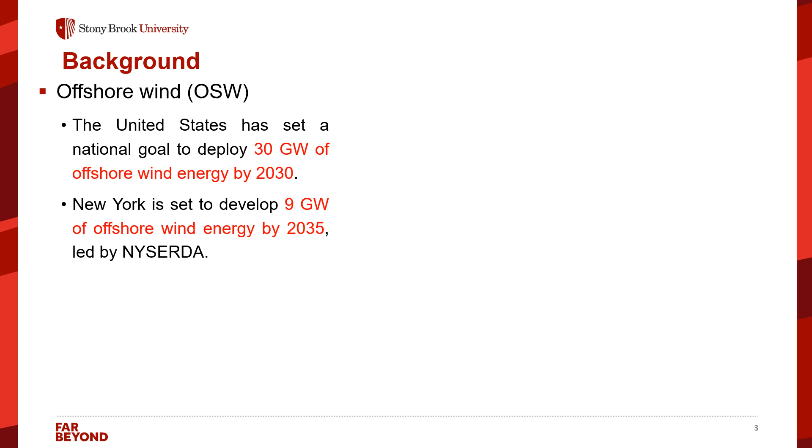Currently, the United States has set a national goal to deploy 30 gigawatts of offshore wind energy by 2030. And in New York, there is going to be 9 gigawatts of offshore wind energy by 2035.

This map shows the offshore wind projects in New York and New Jersey. You can see the wind lease areas in blue. Major projects like South Fork Wind and Sunrise Wind, and key infrastructure like substations and ports, such as the South Brooklyn Marine Terminal. The dashed lines represent how electricity travels from offshore to the grid, highlighting the region's commitment to renewable energy development.

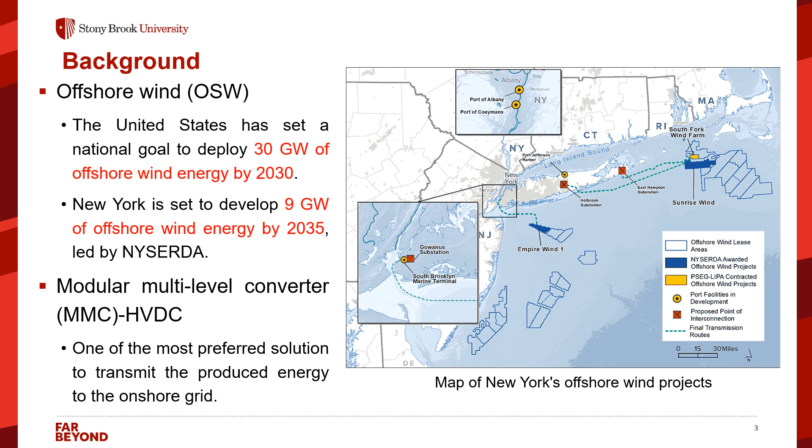For the HVDC transmission system based on the MMC, it is the most preferred solution to transmit the produced energy to the onshore grid.

Since the offshore wind energy relies on natural resources, the system dynamics are persistently disturbed by heterogeneous uncertainties. Moreover, the interconnection and transmission of gigawatt-level offshore wind energy heavily rely on power electronic devices, which deteriorates the system inertia and makes the system even more susceptible to uncertain perturbations. So it becomes critical to analyze the uncertainties and verify the system.

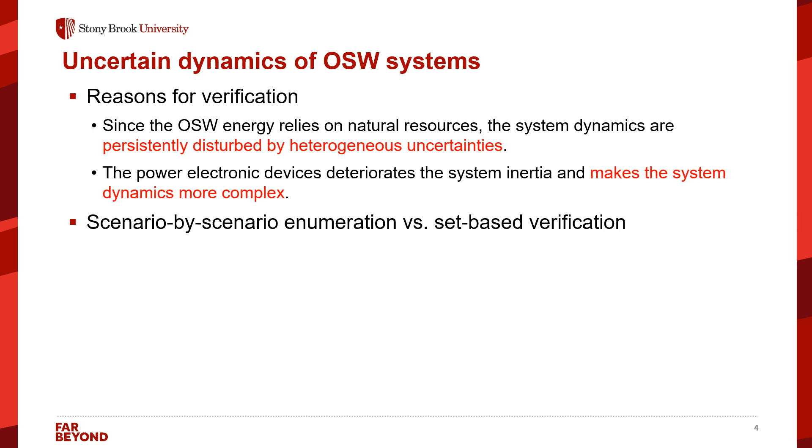Traditionally, one of the most common ways is to perform scenario-by-scenario checking. However, we cannot enumerate all possible scenarios by Monte Carlo sampling. So, if the missed trajectories have intersection with the unsafe area, it potentially indicates safety risks.

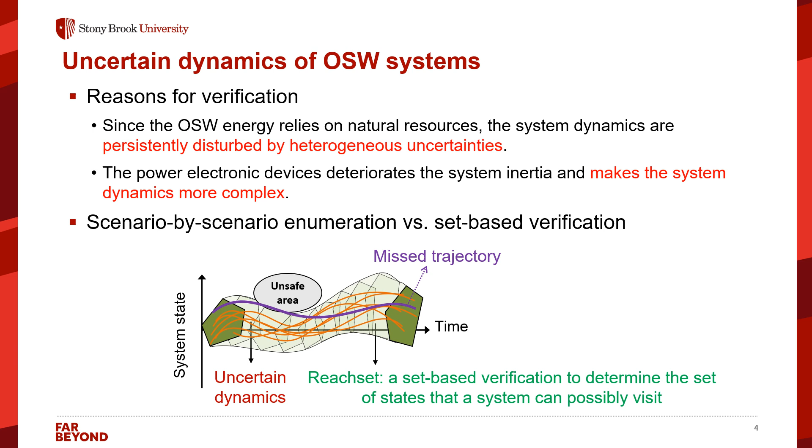In contrast, reachability analysis conducts set-based verification. You can see from the figure. Through a one-time domain simulation, the set of states that the system can possibly visit can be determined without the need for scenario-by-scenario enumeration.

Reachability provides a rigorous framework to predict all possible system behaviors over time, considering uncertainties. For the state space model of the dynamical system, as the upper equation, the reachable set is defined as the union of all possible states that can be reached under uncertain inputs.

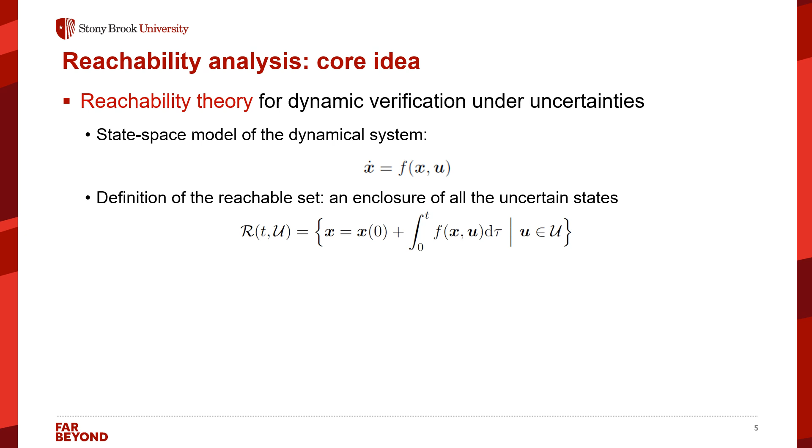However, conventional model-driven reachability methods are time-consuming and numerically unstable, making them unsuitable for real-time verification of ultra-fast inverter-dominated dynamics. Therefore, in this research, we will develop a learning-based reachability analysis method for studying the uncertain dynamics of offshore wind systems.

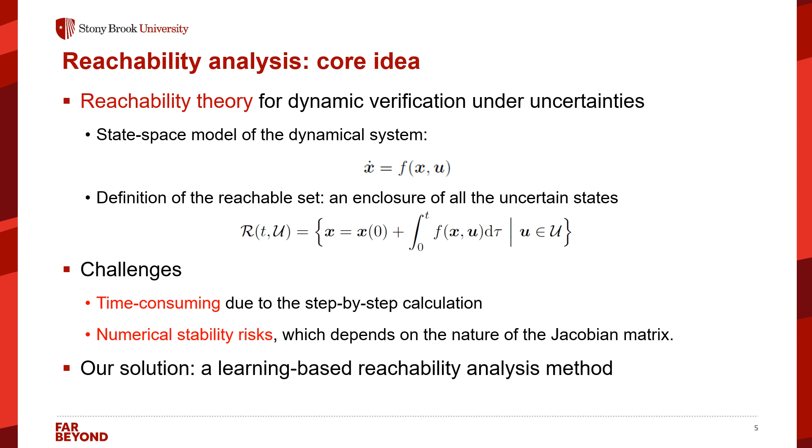After introducing the background, I will specifically introduce the methodologies in this research. As I just mentioned, to conduct reachability analysis of the dynamics of MMC-HVDC offshore wind system, we first build a state space model. The model mainly consists of two parts, the offshore wind power plant part and the MMC-HVDC part.

In the offshore wind part, the dynamics of wind turbines, transformers, and cables are modeled. For the MMC-HVDC part, we mainly capture the dynamics and control of the MMC and its interaction with the offshore grid and HVDC link.

The right figure is a typical offshore wind system that was built in this paper. It consists of two AC grids and two offshore wind grids, which are connected to the 4-terminal HVDC grid through MMC controllers.

The uncertainty from the wind energy is modeled as an uncertain current, representing the aggregated power from wind turbine areas.

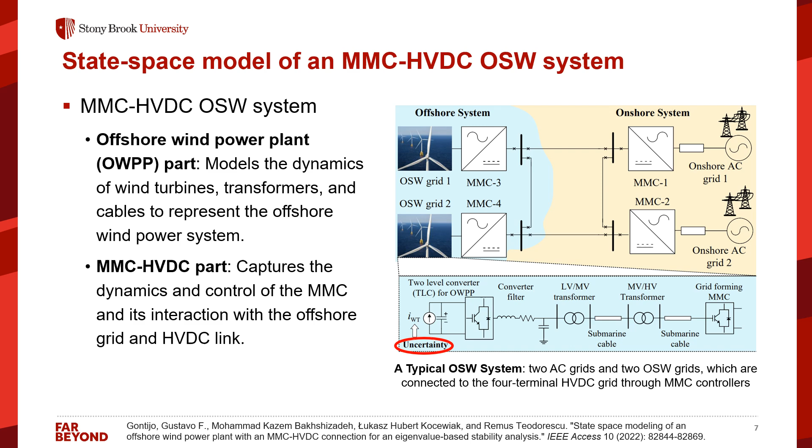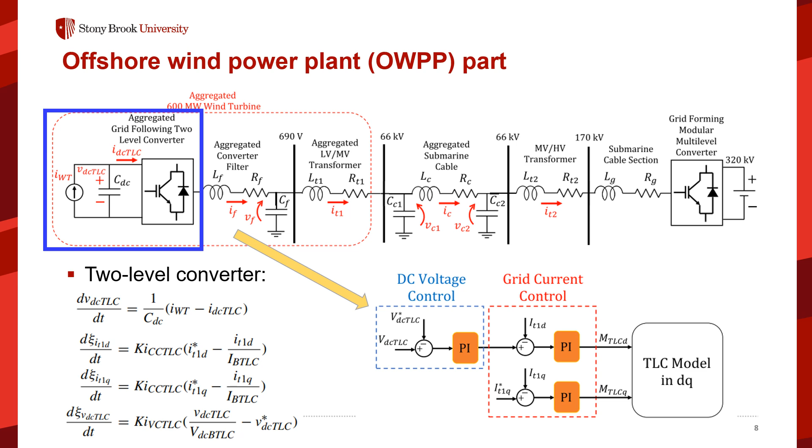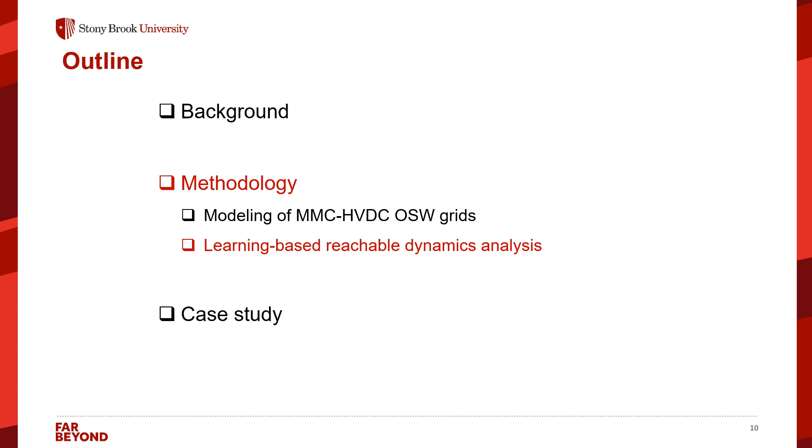After building the state space model of the MMC-HVDC offshore wind grids, we will design the learning-based reachable dynamics analysis method. The target of this learning-based method is to build a data-driven mapping. When the uncertainty and time point are given, the reachable set at the given time can be calculated.

In this research, we use ellipsoid to represent the set, which is defined by a center and a positive definite and symmetric shape matrix.

First, learning a shape matrix that changes over time is very difficult, especially for fast dynamics in power systems. Second, there is no guarantee that the neural network will output a positive definite symmetric matrix.

So we decompose the shape matrix over time into a constant shape matrix and a distance vector over time, making the training process more stable.

And then we decomposed the inverse of the constant shape matrix into the transpose of C times C. C is a non-singular matrix here. So it is more straightforward because outputting such an invertible C matrix for the neural network is feasible.

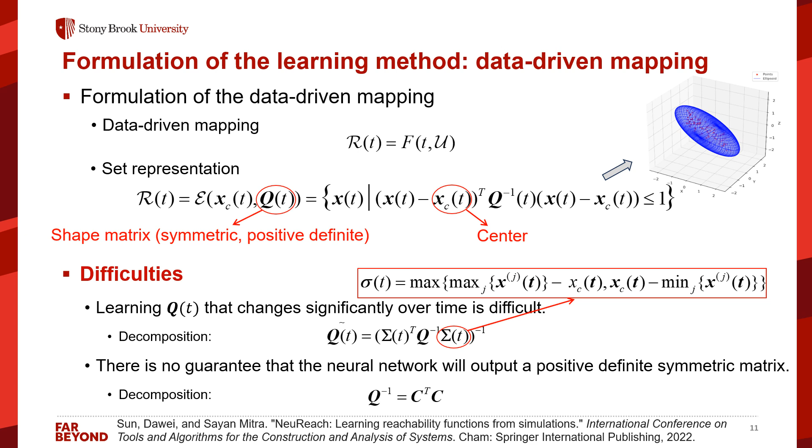With the previous mapping, the next step is to design the loss function and train the neural network. How do we train the neural network to generate appropriate reachable sets? In other words, what's the requirement of a qualified reachable set?

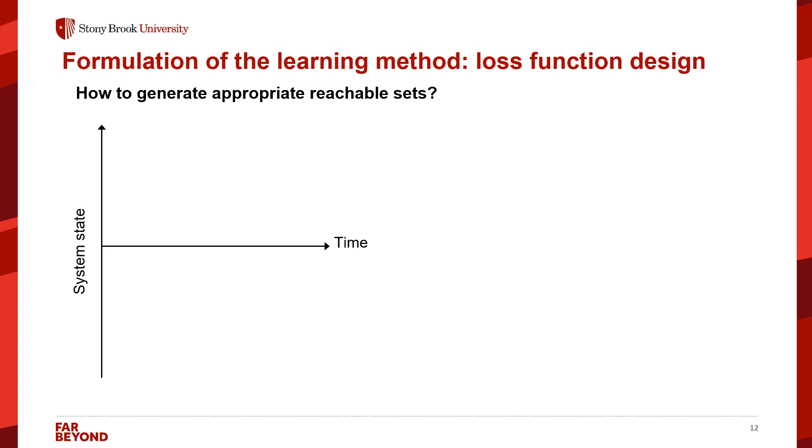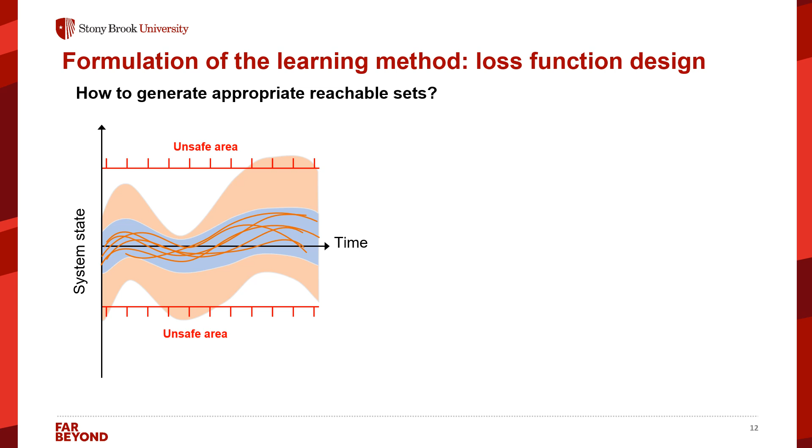Here I give two simple examples to illustrate the two requirements of designing the loss function. First, assume we have a dynamic system, and we know the true trajectories. Here, the blue region is the true reachable set, representing all system states that this system can possibly visit. If we calculate the reachable set like the orange region, we know it's too large. It has intersection with the unsafe area, so we may have some false alerts. That's the first requirement, the tightness requirement.

And second, again, we know the system trajectories and we know the true reachable set. This system is unsafe because it has some intersection with the unsafe area. However, if we calculate the reachable set as a green region, we may have some missed alerts. That's the second requirement, the conservativeness requirement.

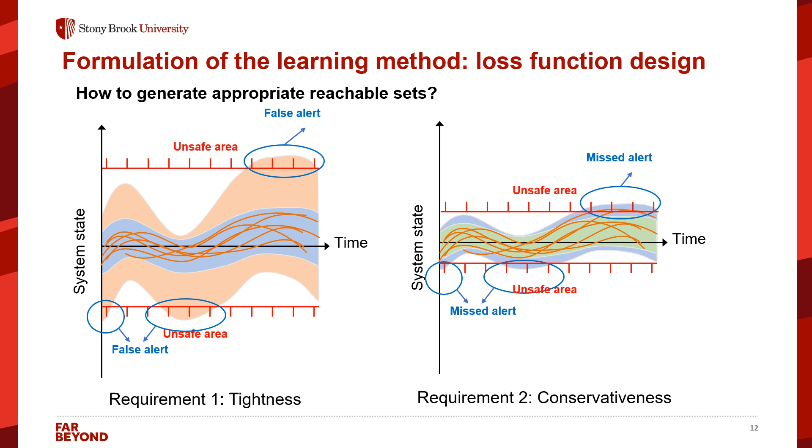Referring to an article from UIUC, we define the loss function. The first part starts from the definition of the ellipsoid and uses an indicator function to judge whether the system state is enclosed by the generated ellipsoid. Once the system state is outside the ellipsoid, it contributes to the loss, which ensures the conservativeness.

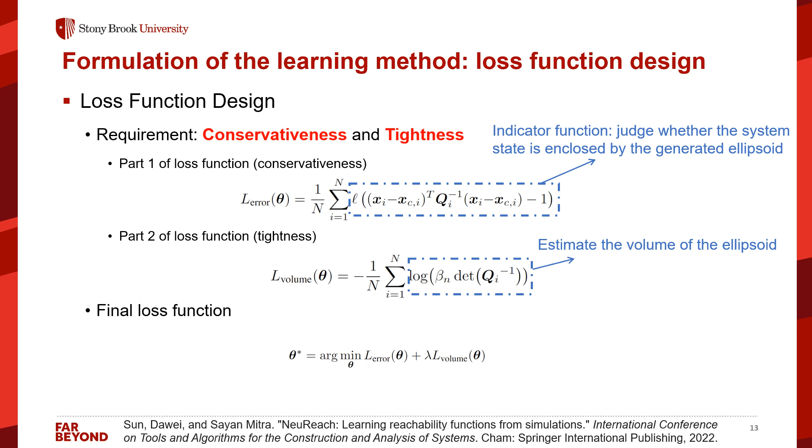Next, for the tightness requirement, the target becomes minimizing the ellipsoid. The larger the ellipsoid is, the more it contributes to the loss. Finally, a weight is used to balance the two parts.

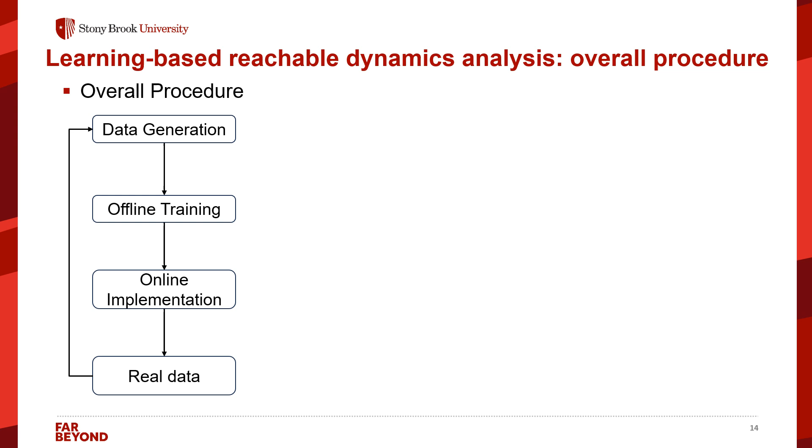Here is the diagram. We sample the uncertainty levels from the uncertainty sets and formulate the trajectory pool by simulation, so the dataset is built. By applying our device learning strategy, we can train the neural network, and the well-trained neural network is used for online verification.

More importantly, by implementing the well-trained neural network and conducting online verification, more real-time data is generated, which can be used for fine-tuning.

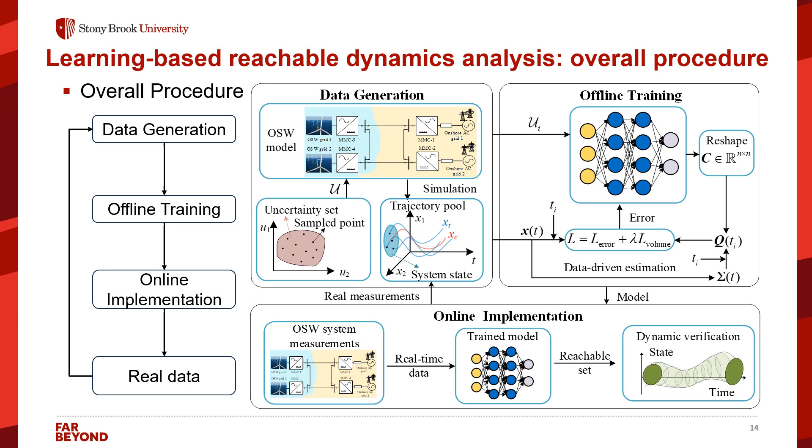The system comprises 2 AC grids and 2 offshore wind grids, which are connected to the 4-terminal HVDC grid through MMC controllers. We generate 100 uncertainty sets, with 10 random trajectories under each set. The center can deviate from the nominal operating point by a maximum of 20%, and the radius of the uncertainty set is uniformly sampled with an additional 10% uncertainty.

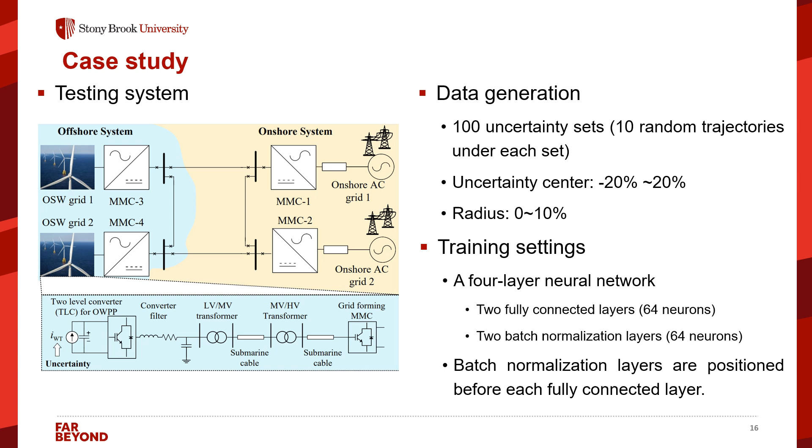For the training, a 4-layer neural network is adopted with 2 fully connected layers and 2 batch normalization layers, with 64 neurons in each layer. Each batch normalization layer is positioned before each fully connected layer.

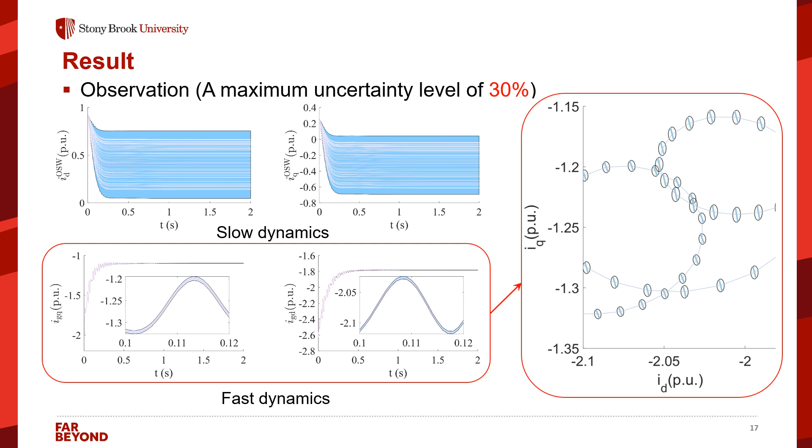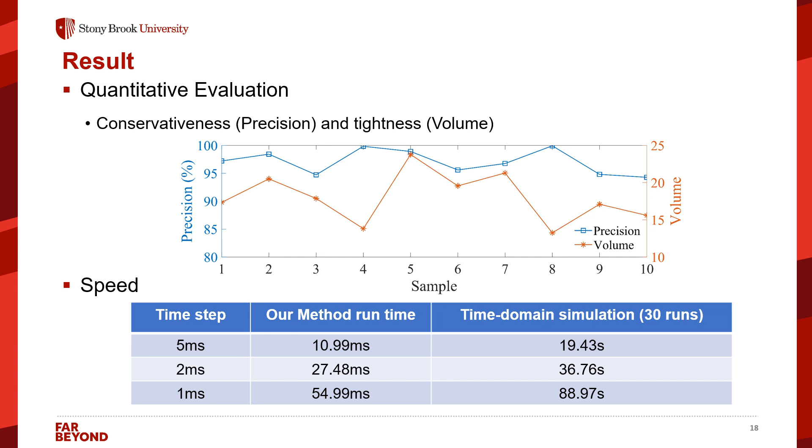So far, we have further developed this method, making it more adaptive to complex systems and unstable cases, while considering more factors in dynamic systems. The latest method achieves better numerical stability, robustness, and training efficiency.